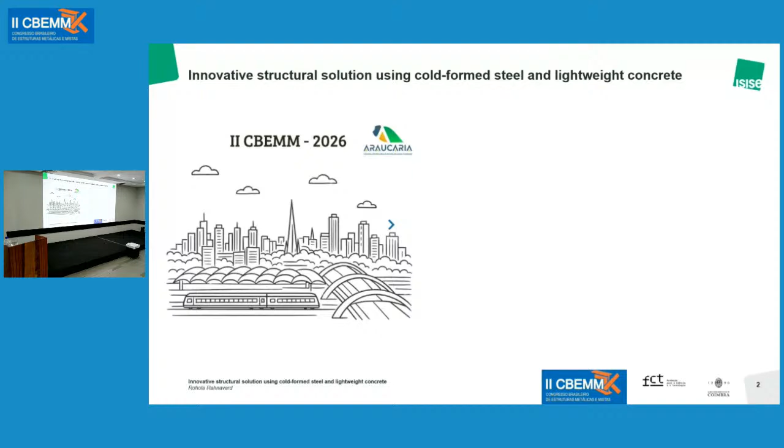I would like to say that this is my first visit to Brazil and Maringá. However, my history with Brazil is about 30 years. I'm going to explain this history briefly. I was born and raised in a small town in a corner of Iran. When I was 5, I don't know why, but I just fell in love with a football player at that time, whose name was Bebeto. Maybe because his name was so easy and nice. So when I was 5, I knew that I am an Iranian and I like a football player from Brazil.

But 20 years later, I moved to Portugal to continue my education at the University of Coimbra. In 2020, during the pandemic, I was alone in the lab preparing my tests, some of which I will explain here. Then a Brazilian student just entered the lab. It was his first day. That student was José Filho. Later he told us that we have to call him Zé.

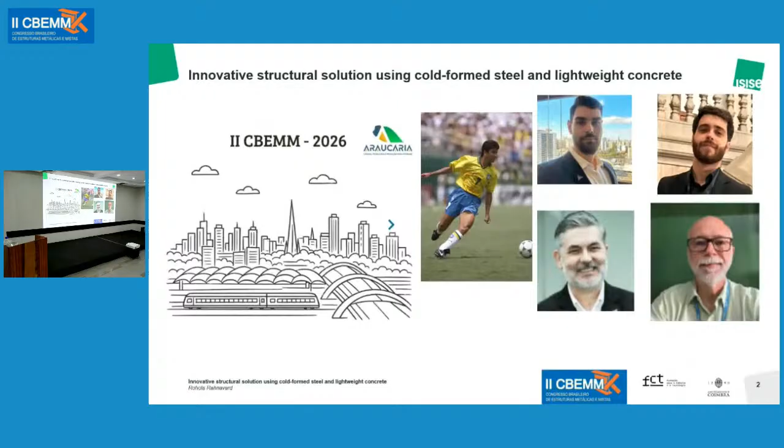Two years after that, I went for a short visit to Luxembourg and I met another Brazilian from Maringá, Adriano. They both talked about their supervisor and colleague from Brazil, and they introduced Professor Caldas. I met Professor Caldas at the CMM conference, and immediately we became friends, like we had been friends for a long time. At the CMM conference, I also met Professor Luciano for the first time. After the conference, he said that we would see each other in 2 years. But 1 week after that, I went to Hong Kong for a conference with Professor Da Silva and Professor Elena, and there I met him again. In Hong Kong he also said that, well, probably we would see each other in 2 years. But here we are after 3 months in Brazil, and I met him again.

So let's move forward to the technical part of my presentation. I will talk about an innovative structural solution using cold-formed steel and lightweight concrete. This is a system that we proposed and investigated over the last 2 years. Basically, this slide shows everything about my presentation because we investigated the column, the beam, and the connection.

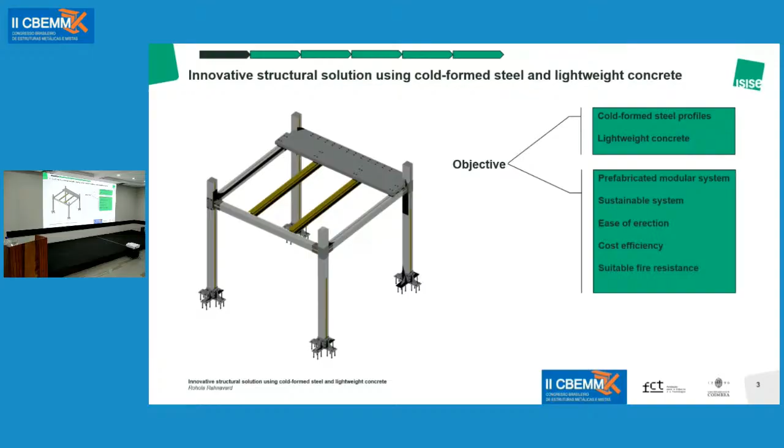This was our objective: to present an innovative system using cold-formed steel and, of course, lightweight concrete in order to be prefabricated, sustainable, and cost efficient, and also suitable in terms of fire resistance. For this purpose, we tested columns, beams, and plug and play joints. For the column, we performed test, simulation and design under compression and fire. Then for the beam, we tested under bending effects and also subjected to elevated temperature.

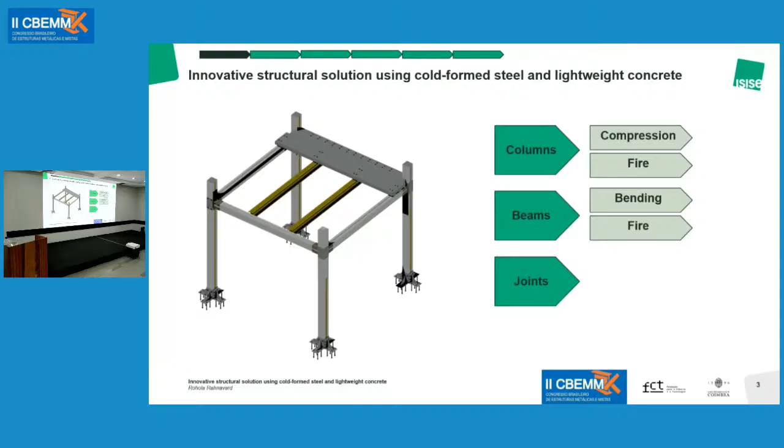Now, let's move on to the first chapter, which is the composite column. Our research team in this section was Professor Elder and Professor Rui Simões. I also received significant help from two technicians, Vidal and Miguel, from the University of Coimbra.

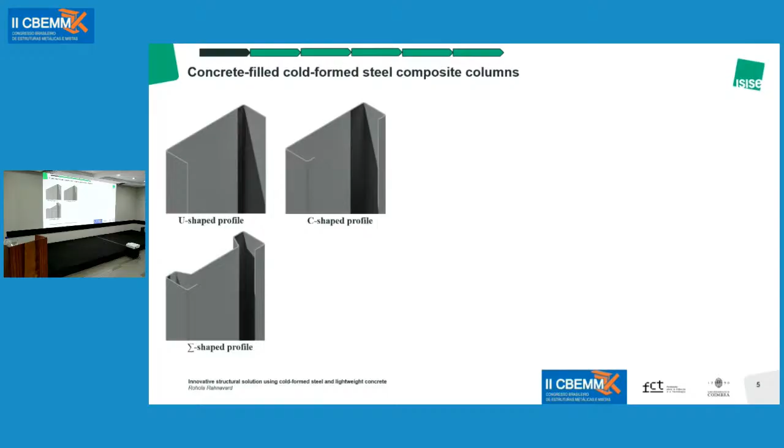For the composite column that we presented, we used three sections that we call U-shape, C-shape, and sigma. We built up the section using self-drilling fasteners and then filled it with lightweight concrete. Here is a photo of the experimental test that we prepared in the lab.

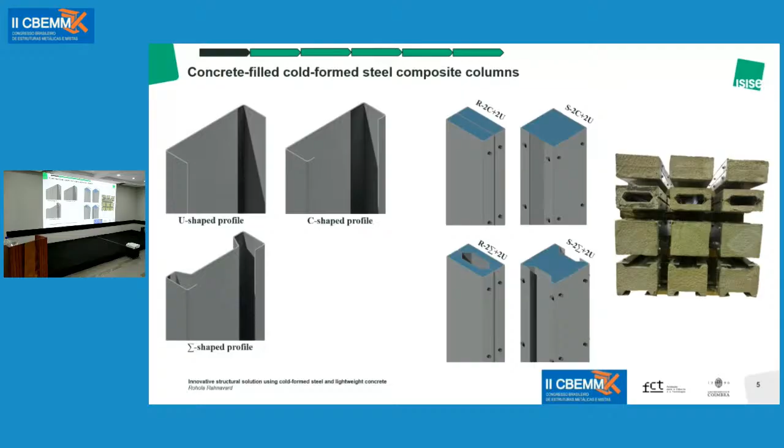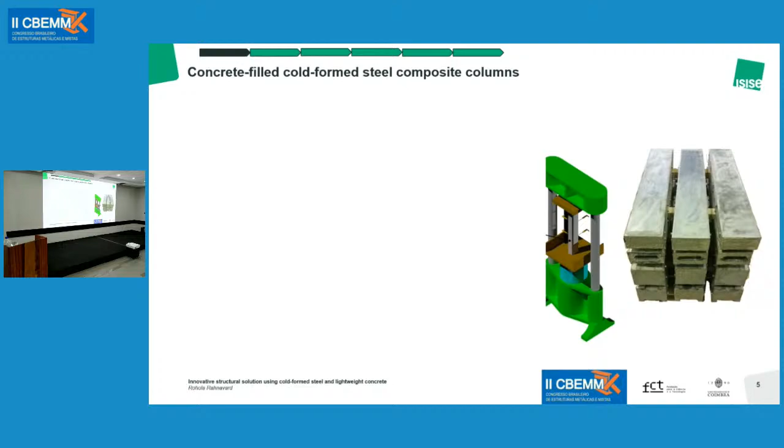We tested two types of column in terms of slenderness. Columns of approximately 1 meter, for which we used the universal testing machine. And then we tested 3-meter columns to see the effect of slenderness. For that, we assembled a test setup for the 3-meter test.

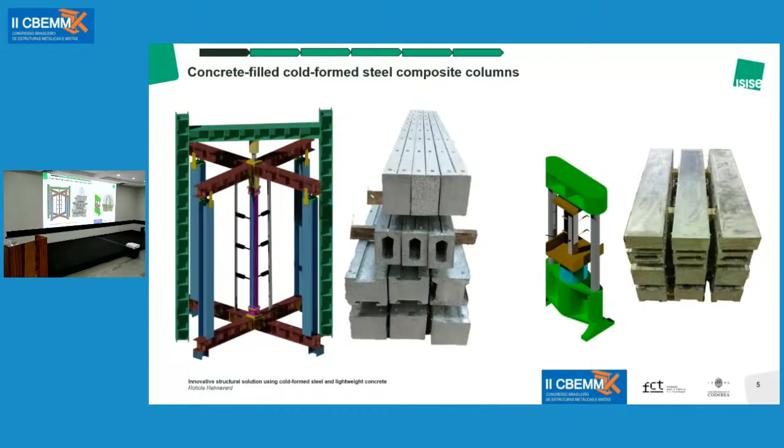We had one challenge. Maybe you see this column is without any deformation. Actually, this was the first test that we did, and we didn't have a proper boundary condition. The section of the column is about 1.5 millimeter, and if you don't have a very smooth surface to transfer the load from the machine to the concrete and steel at the same time, you will have crushing at the boundary condition. Therefore, we clamp the column from both sides in order to protect the boundary condition of the column from early failure modes.

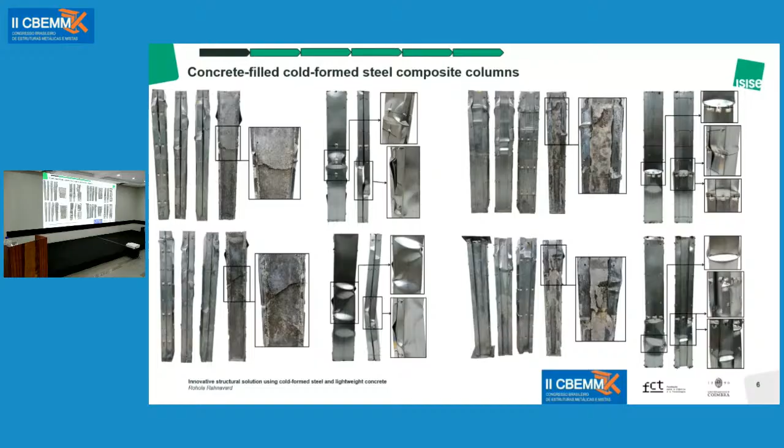Also, we tested the column without concrete, basically bare steel, okay? The reason that we did this was first to see the behavior of the cold form steel sections. Also, later on, in order to propose equations to determine the capacity of the composite column, we decided to do the test to see the contribution of the cold form steel section within the composite system. Also, we wanted to know if the behavior improved or not compared to the steel section itself.

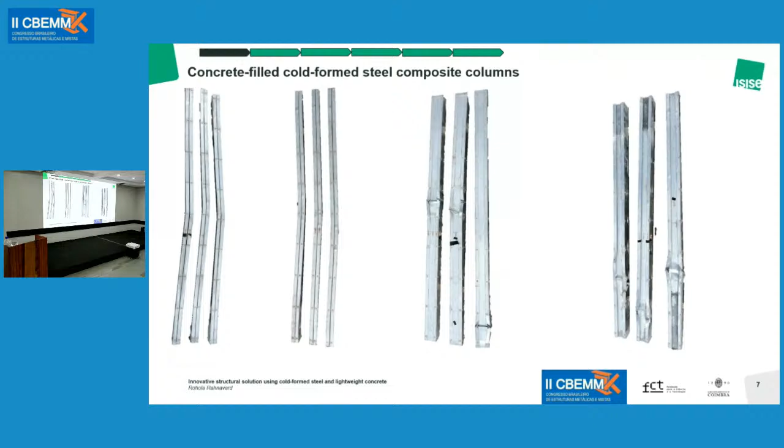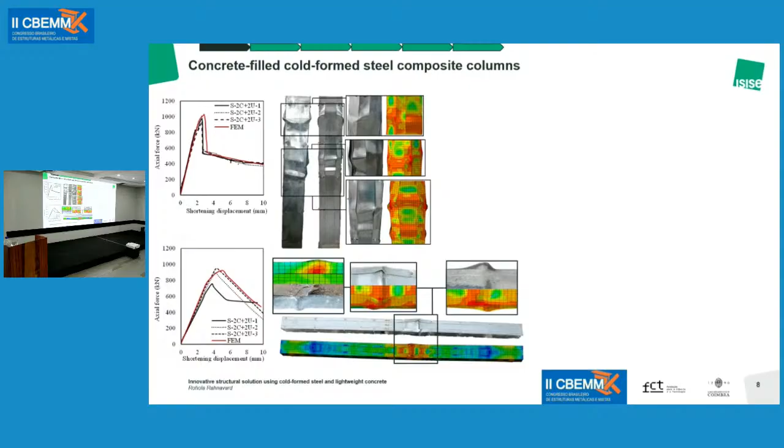And then we went for the calibration to have a reliable model that can well predict the behavior, because later we can extract some data from the models that we cannot extract from the test. So here you can see that the simulation well captured the failure, the loading, the capacity, and the behavior. After having the understanding from the test and also calibration, we performed a parametric study on the composite column.

But here we have only these two sections, and these analyses were only for stub columns because we wanted to know the plastic resistance of the composite column, not for the long column, okay, just plastic resistance. So we designed the stub columns so that their non-dimensional slenderness be less than 0.2 to have the plastic resistance.

So we basically ran 1,300 simulations with 2 different steel grades and 3 types of thickness, 1.5, 2, and 3 millimeters, and also the profile height from 100 to 300 millimeters. The reason for this range was that this is the range of the cold form sections that we have in Portugal and Europe. This is more or less the range.

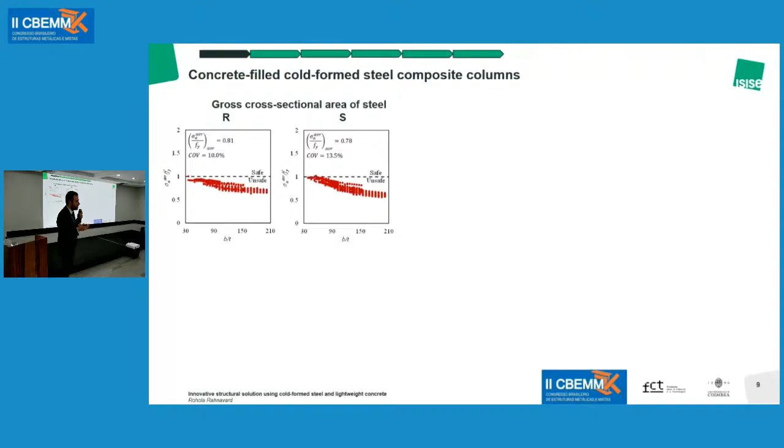Therefore, we consider the whole cross section as effective cross-sectional area. We calculate it for the whole section, and you can see that the results are in the unsafe region, with a result that is way less than the experimental test and the simulation.

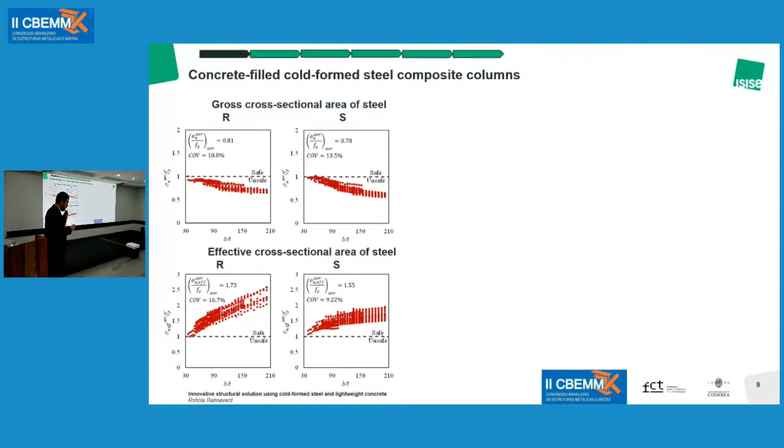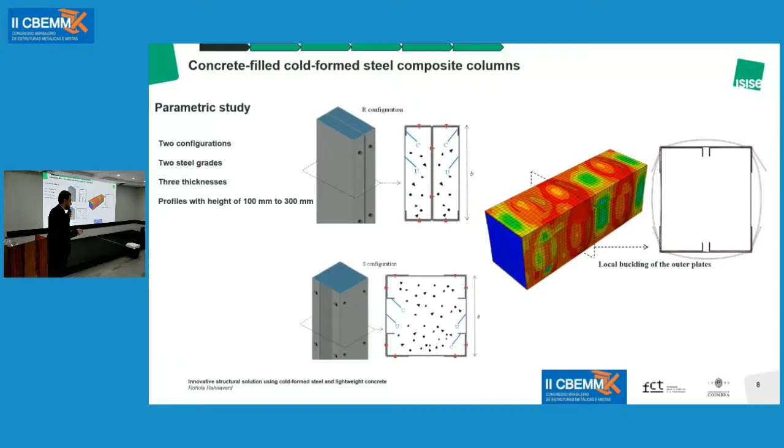If you remember from this slide, we said that the inner section remained unbuckled. Therefore, according to this, we classified the section: for the inner core, which is colored here in blue, we consider gross cross-sectional area, and for the outer surface, which is in red and green, we consider effective cross-sectional area.

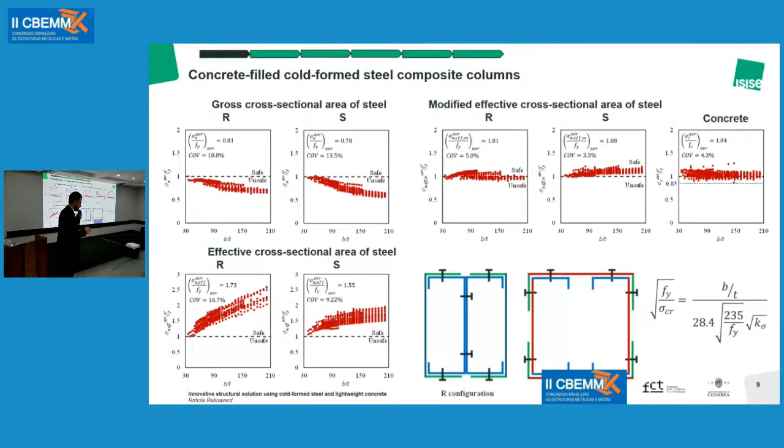Also, we extracted the contribution of concrete now. Eurocode suggests 85% of the resistance of the concrete to be calculated, and says that with some modification you can consider one. We examined it here, and the result shows that the factor of 1 is fair enough to calculate the resistance of concrete within the system. So finally, we compare the plastic resistance of the composite section with the simulation.

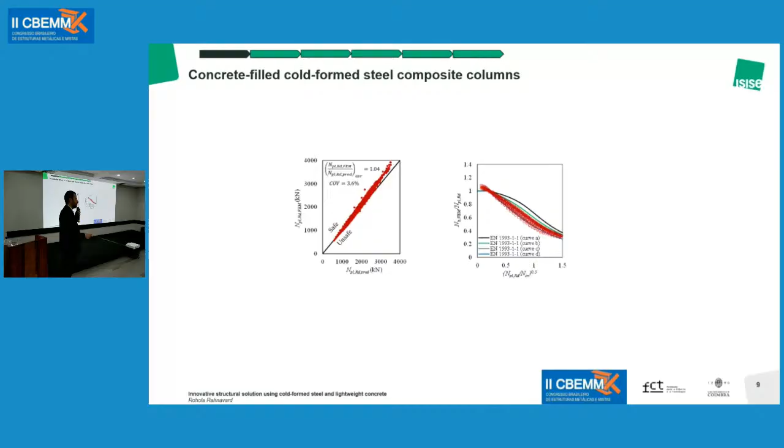Here you can see 1,300 simulations show that the resistance of the finite element over the prediction is around 1, with a coefficient of variation of around 4, which is acceptable. Also, we did more or less 7,000 simulations for the slender column, and we compared it with the buckling curve according to Eurocode. And the final conclusion is that buckling curve D is more accurate for such a composite system.

Now we tested the same columns. It's hard to say the same column, but a replica of the other column, subjected to elevated temperature. The team was the same, only Professor Luís Laím, who is an expert in fire, was added to the team. For the test setup, we also had a setup that we built, and we covered the specimen with the electric furnace that we have at the University of Coimbra. So we had two types of tests, short ones and long ones. I'm going to explain the buckling and failure mode later.

Now I jump and briefly go to the simulation and calibration. The failure mode of the long and short columns was local buckling of the steel section. Here you can see that for the short and for the long column, the failure mode was due to local buckling.

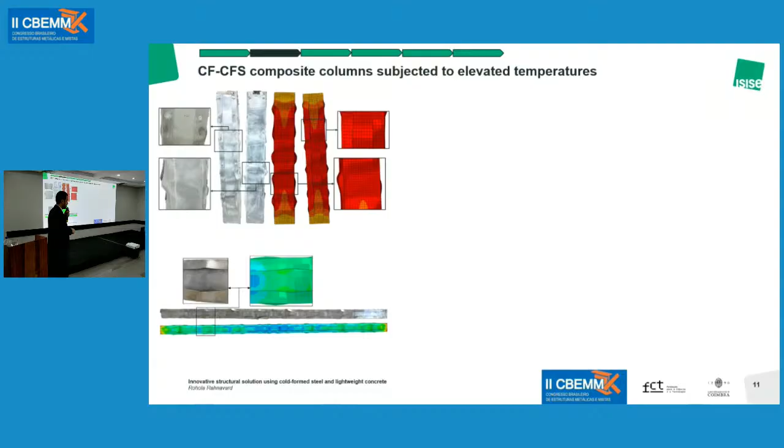Then we performed heat transfer analysis in Abaqus, and we compared the result on the surface of the steel section and inside the concrete, the temperature evolution, for the short one and for the long one. Of course, we measured the temperature at many levels of the column, but here we are presenting the mid-level, using the thermocouples that we had.

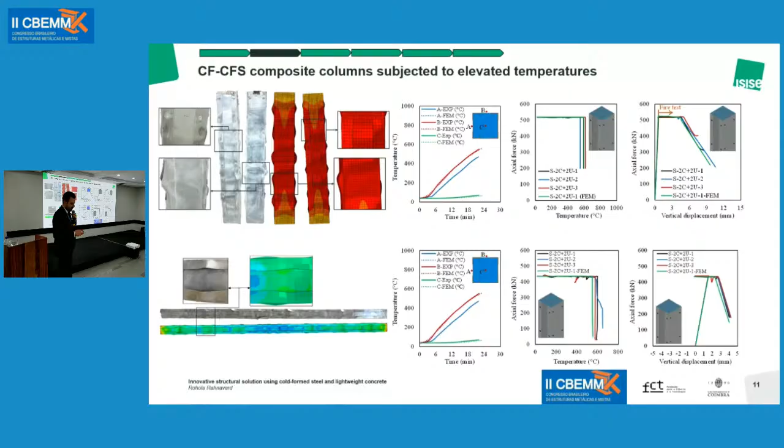Then we performed a fire resistance analysis, and we compared it with the experimental data, which is in very good agreement. Also, we compared the elongation, because the elongation of concrete and steel is way different, but within the composite system it is so difficult to capture. So we checked the elongation of the composite system and compared it with the finite element simulation, which were in close agreement.

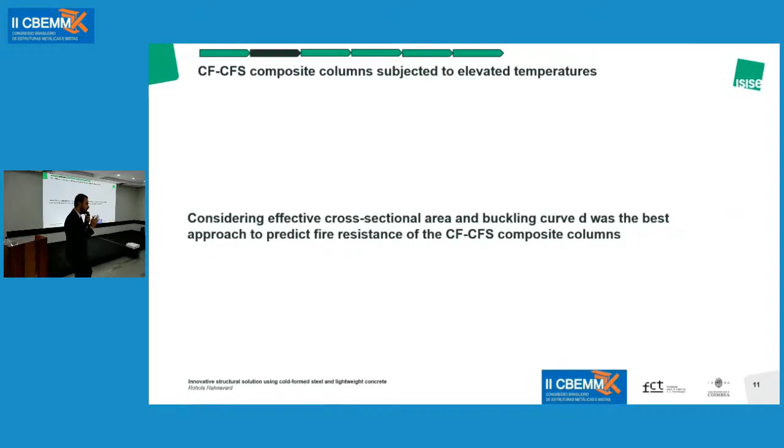Also, we compared the result with Eurocode, and according to our calculation, if we consider effective cross-sectional area and buckling curve D, we are in good agreement with Eurocode 4, part 1-2.

This explosion happened 30 minutes after the test was finished. So we had the test, we saw the fire resistance, and then the furnace was closed. I went to my office, which was very close to the lab, and then after 30 minutes, we heard like a big explosion. Then I said, oh my God, I want to be promoted by Professor Da Silva. I don't want to be fired. So we have to analyze because we are going to damage the electric furnace.

So my colleagues said that we have to probably warm up the column in order to release some of the moisture. So we did that for 8 hours with a temperature of 50 degrees just to warm up the column. Then we did the test, and I said, look, this is a possibility, but we have to monitor it. So I was close to the furnace, monitoring, and after like 30 minutes, again, there was an explosion. And then I said, oh, for sure, I'm going to be fired.

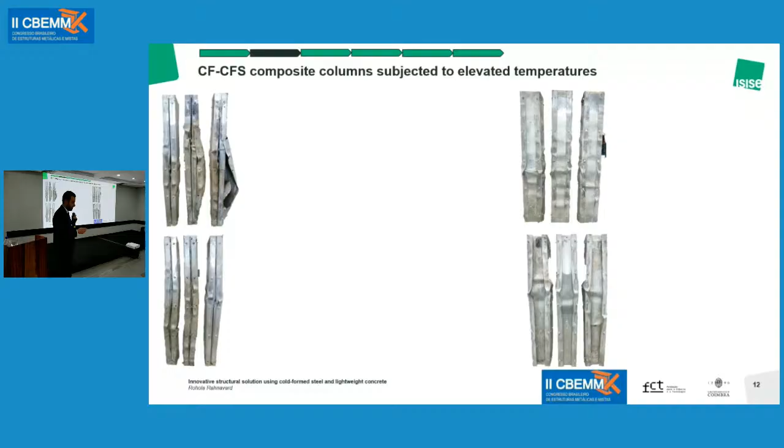But during that monitoring, I realized that because the furnace was so hot, we could not open it immediately due to safety. But what kind of safety? We had explosion after. So when the furnace was closed, the air temperature was about 700 or 800. To make a balance, the temperature of the concrete inside was about 70. So after 30 minutes, the temperature of the air went to like 500, and the temperature of the concrete increased to 200. That's why we had the explosion. So we decided for the later tests to open the furnace slightly, and we took the risk to open the furnace slightly, and then we didn't have an explosion in the next test.

Here also is an image of the cold-formed steel section without concrete, and you can see that the failure mode is that basically the thin wall steel was somehow melted.

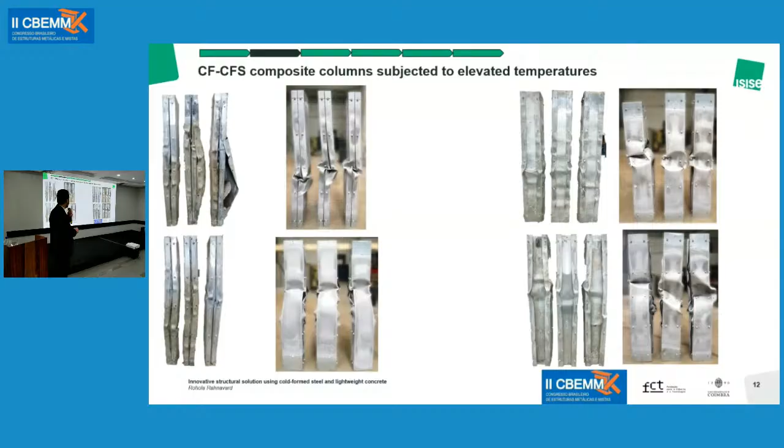Another challenge later in design that we had in composite column was that if you design composite column according to Eurocode 4 part 1-2, you need to have heat transfer analysis, and then you have to divide the concrete section into different layers with somehow uniform temperature. The calculation is complex because you need the heat transfer analysis, and heat transfer analysis is not easy to be performed. So we defined a task there. We have to tackle this also.

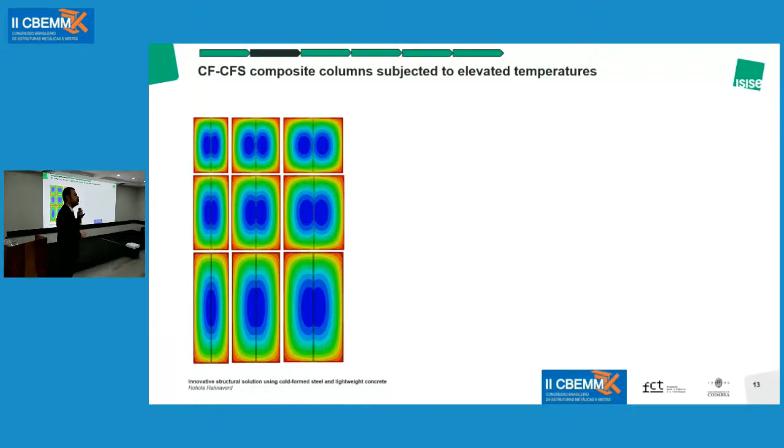So we did 3D simulation of heat transfer analysis, and you can see here that the temperature in the inner core, about 50% of the edge, and the outer core is somehow uniform. So we presented an empirical formulation that can estimate the temperature over time for the core of concrete, inner core, outer core, and the surface of the steel. So we calibrated this formulation. Of course, we calibrated the heat transfer analysis before. Later, we calibrated the empirical formulation with the finite element simulation.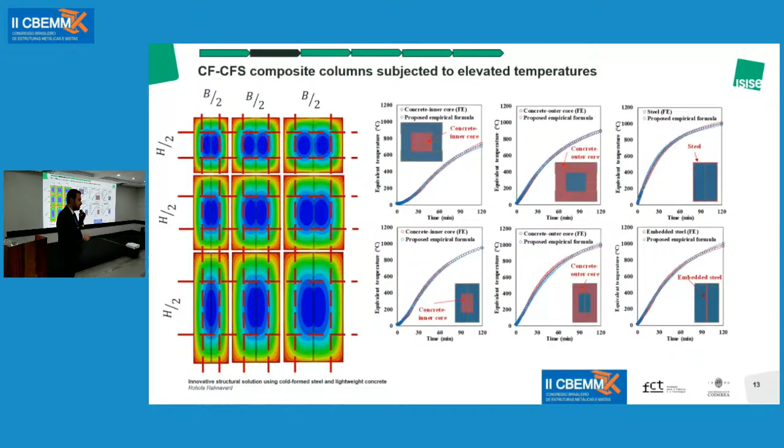And here you can see that for the inner core, outer core, steel, and again for the other section, inner core, outer core, and the embedded steel, we could capture the temperature evolution. Okay, so we're done with the column. Now we go for the beam.

The same team, but when we were close to design, we had the help from Professor Benjamin Schafer and Professor Shahab Torabian from Johns Hopkins. So for the composite beam we had two back-to-back sections, lipped channels attached by self-drilling fasteners. And then we connected the steel section to the concrete slab using bolts. The reason for that was that we were using thin wall steel section. We cannot weld it because we may burn the steel. So the solution that we had was to use bolts.

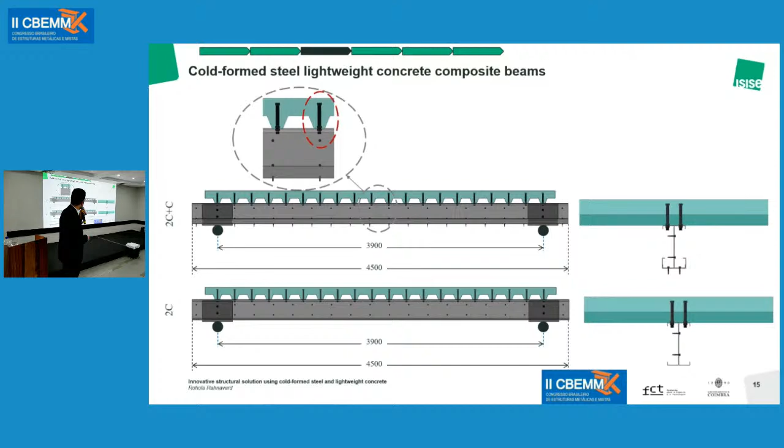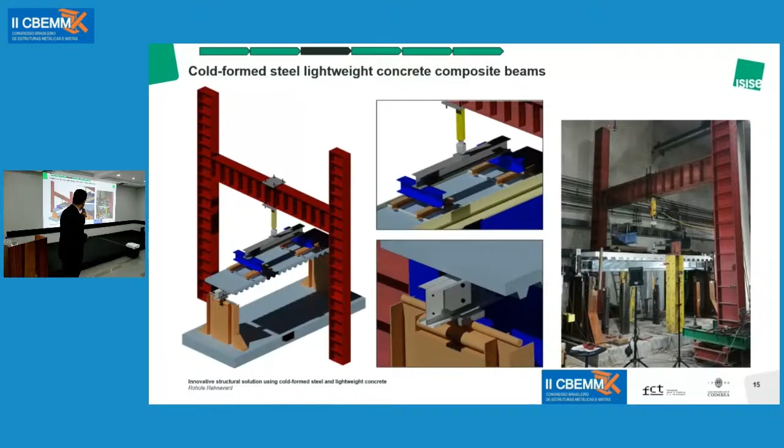Here you can see some details. And briefly, the test setup was a 4-point bending test. And here you can see the failure mode and comparison with the finite element analysis. Because I have calibration and later formulation, I'm skipping showing all the results of the test.

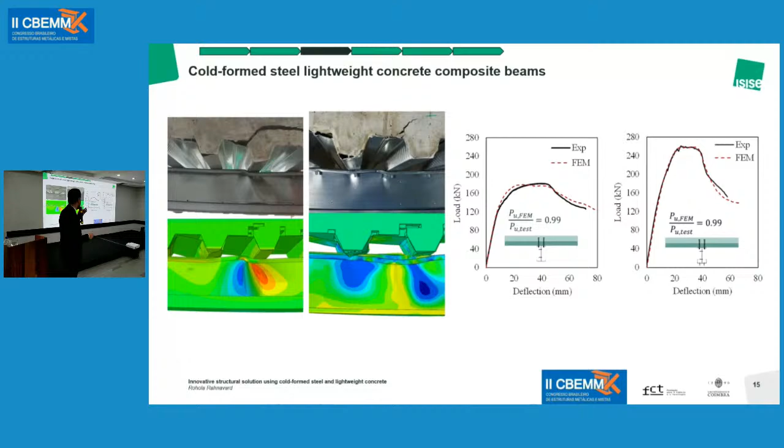So we performed 720 simulations of composite beams with different lengths, just to give you an idea how long it takes for one model. If you have a model with 3 meters and a mesh of 20 millimeters for concrete, the running time until you have the failure mode is about 8 hours with the computer, if you're using 8 cores of Abaqus, okay?

The biggest model that I had was 8 meters, and if you do it with the same computer, it is probably more or less 7 days. But I was lucky that I used the HPC and I ran the models in a very short time. So we had 5 spans, 2 configurations, 2 steel grades, 4 concrete grades.

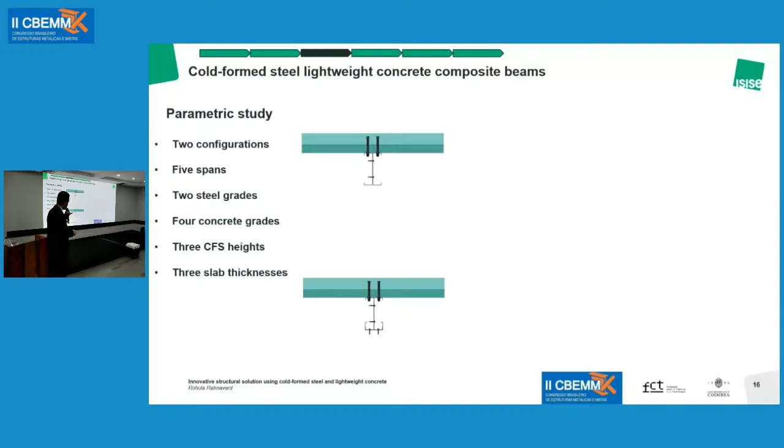I will explain the concrete modeling later in the next section. And we had 3 heights of the section and 3 slab thicknesses. So we compared the results with Eurocode 4. You can see that the results are falling in the unsafe zone. The reason is that Eurocode 4 doesn't cover shear connectors that are bolted shear connectors.

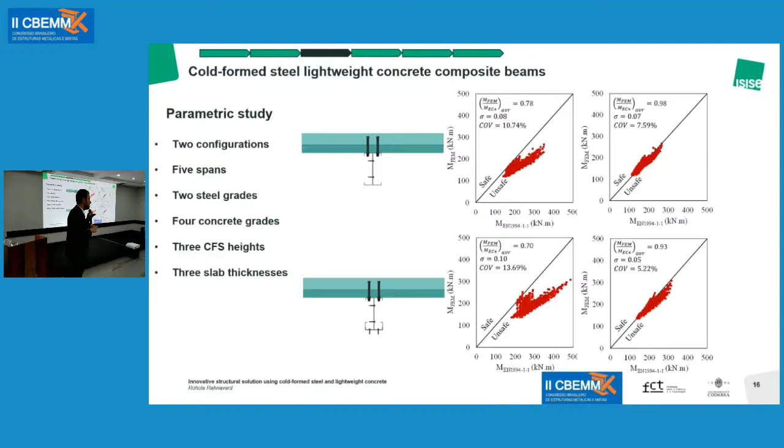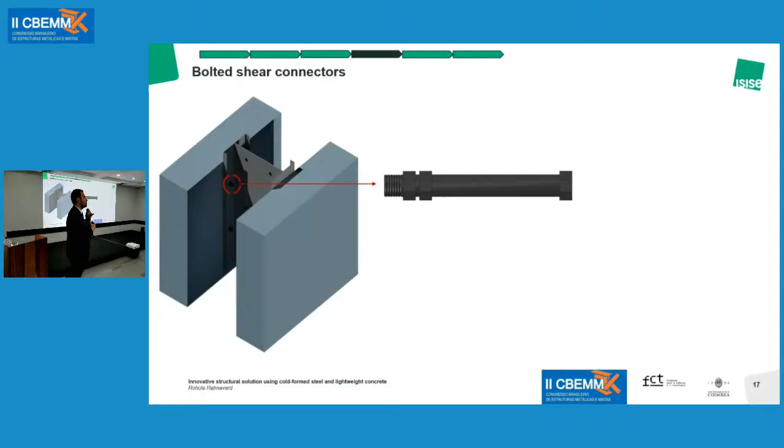And also Eurocode 4 has a limitation that specifies that the diameter of the bolt over the thickness of the flange should be less than 2.5. But here we have something about 6.4 because we are using a thin-wall section. So we did a push-out test just to measure the shear resistance of the bolt here. And we can see that the result is much closer to the parametric study and the finite element.

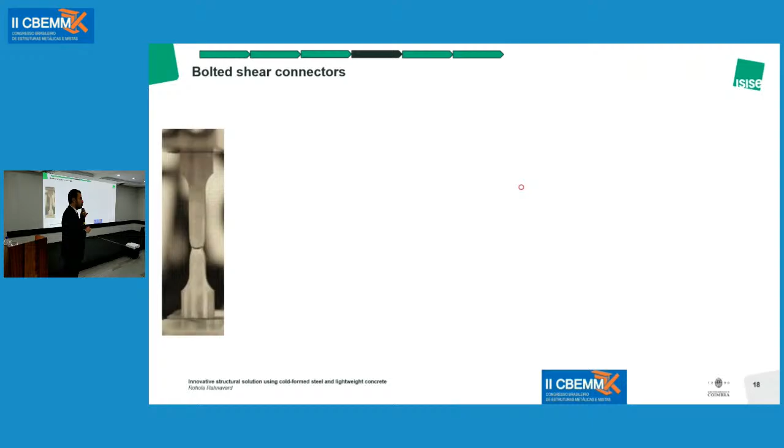So then we decided to tackle this and propose a formulation for the shear connector, like the bolted shear connector within the composite system. For that, we started a detailed modeling to capture the fracture of the bolt, fracture of the cold-formed steel, and failure of the concrete. So now I am explaining the bolted section, only the bolt material.

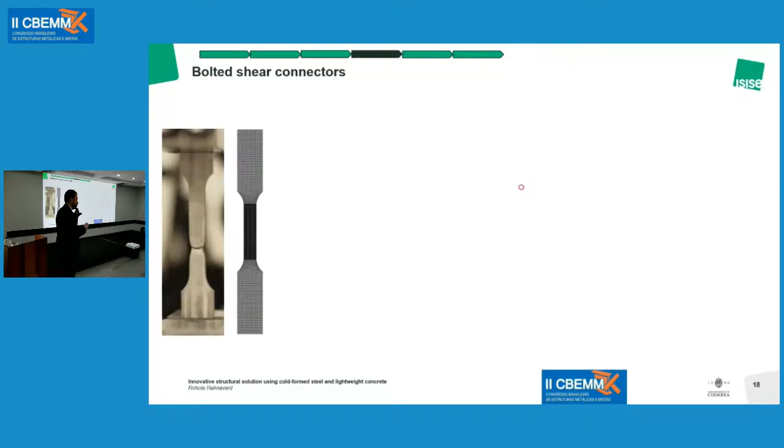This is a coupon that was extracted from a bolt, done at TU Delft. We converted the engineering to true stress-strain curve using this formulation. And then we calibrated only the coupon test and extracted information like equivalent plastic strain and triaxiality for this point. And then we drew the triaxiality. But this triaxiality, we only calibrated for the tension region, but for the interaction between tension and pure shear, we have to calibrate it with the shear test of the bolt.

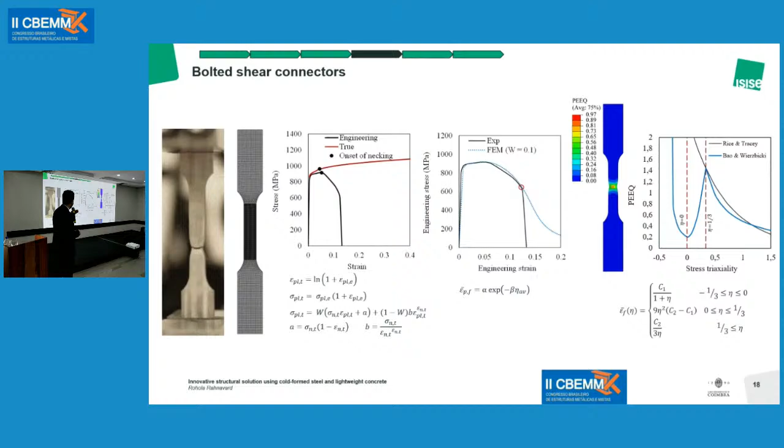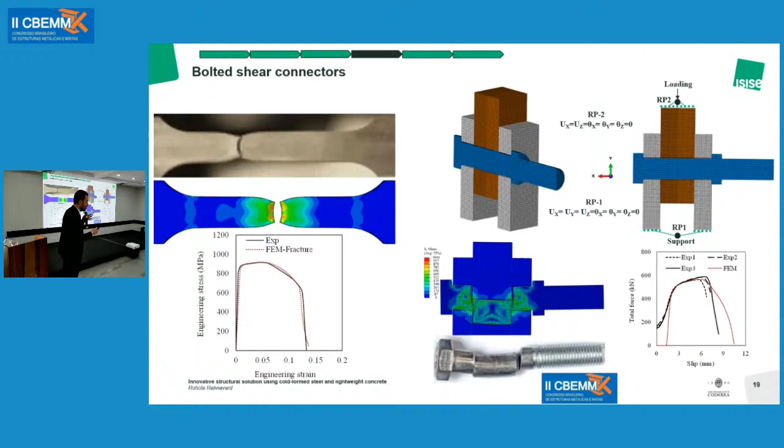Okay, so for the coupon test, we calibrated the engineering stress-strain curve, and for the shear test of the bolt, we also calibrated the failure mode due to the shear against the test. In order to give you a feeling of the modeling, I have two videos here of the shear test and tensile test, including the fracture for the selected bolt. Usually when you have a failure mode due to the shear, you have a cut, like a smooth surface after the failure.

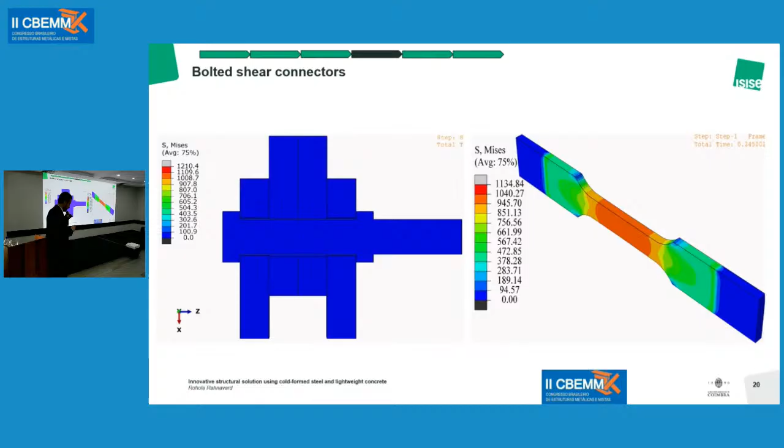Then we simulated the behavior of concrete, which is so tricky in Abaqus. So we had 3 grades, linear up to 40% of the maximum, and then non-linear. Also, we modeled the concrete in tension. You see the stress-strain behavior and damage variable.

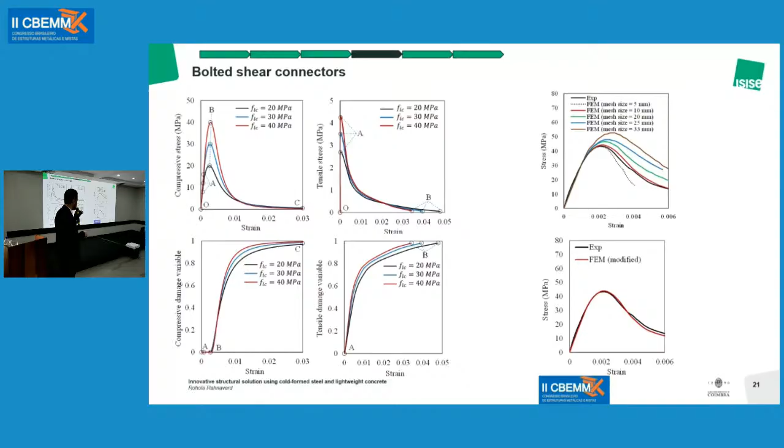One thing that needs to be taken into account, which I propose in the paper and have almost nowhere else seen, is that the compressive behavior of concrete is also mesh dependent. So this is a comparison of compression tests of the same material, only I changed the mesh size, and the results are so different. So I propose a modification to model the concrete behavior in compression as a mesh-dependent variable. And here you can see that the compression behavior is well calibrated with the test.

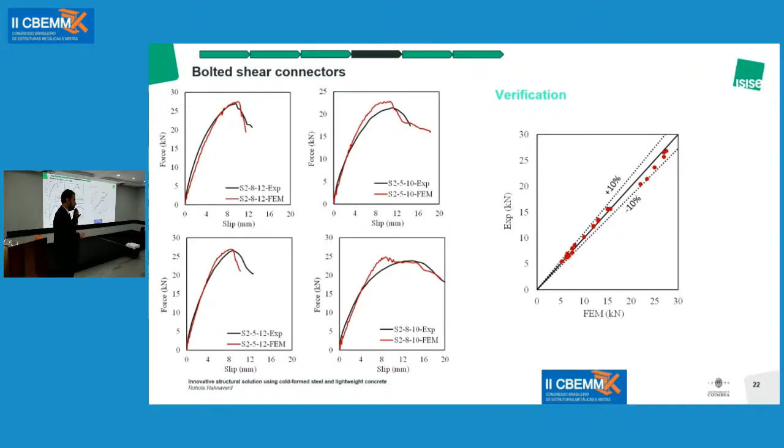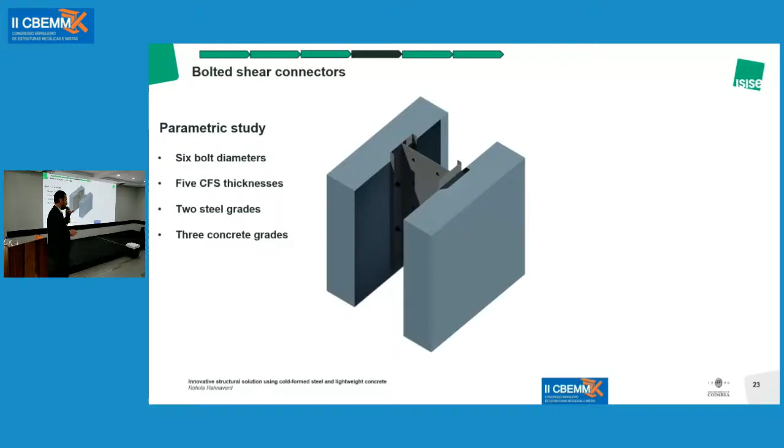And then later, we calibrated the push-out test with about 27 experiments available in the literature. And now we move on to do a parametric study only for push-out tests and the shear connectors. So we had 6 bolts, 5 thicknesses of cold-formed steel, 2 grades of steel, and 3 grades of concrete. We compared the results with the equation according to Eurocode. We expected that the results would not be aligned because Eurocode is not for this type of shear connector.

So we added a new failure mode because the Eurocode equation for shear connectors says that the failure mode is either the shear failure of the studs or the crushing of concrete around the studs. But since here we are dealing with a thin-wall structure, we have to take into account that the failure mode might be because of the bearing of the hole in the cold-formed steel, because you're dealing with a very thin-wall system. So we considered the resistance of the hole of the cold-formed steel according to Eurocode 3, and the results were more or less close.

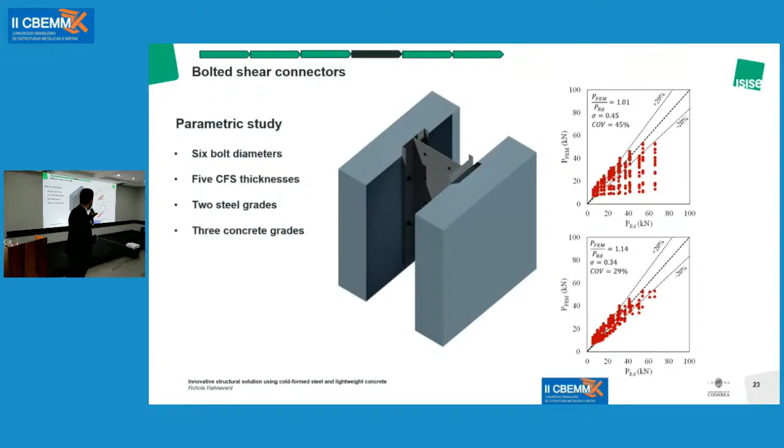So then we went to modify and propose a new equation for this type of shear connector. So we analyze the different failure modes of the bolted shear connector. The first failure mode, this is a typical failure mode, was because of the crushing of the concrete. And then after that, this corresponds to point A here.

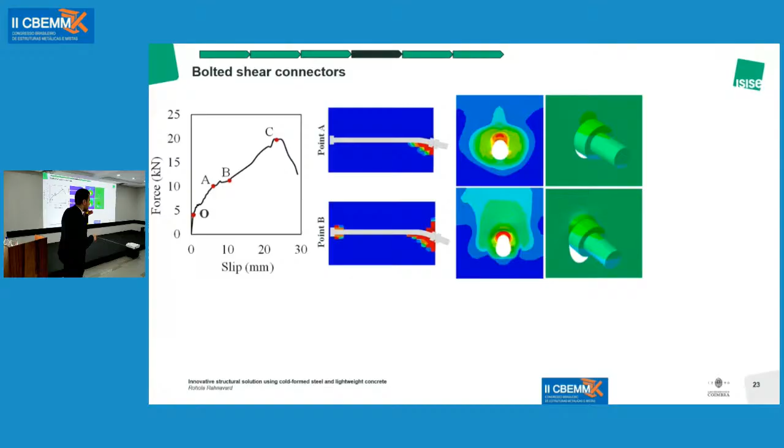And then after that, we had failure due to the bearing of the hole. And later at point C, which was the maximum, the failure mode was because of the tearing, okay? Tearing failure mode. So this is our proposal, that we consider a limit for the linear behavior and a certain limit for the maximum non-linear behavior. So if the slippage between steel and concrete was about 0.6 millimeter, we consider it linear. And if the slippage was 6 millimeter, we consider it maximum non-linear, because

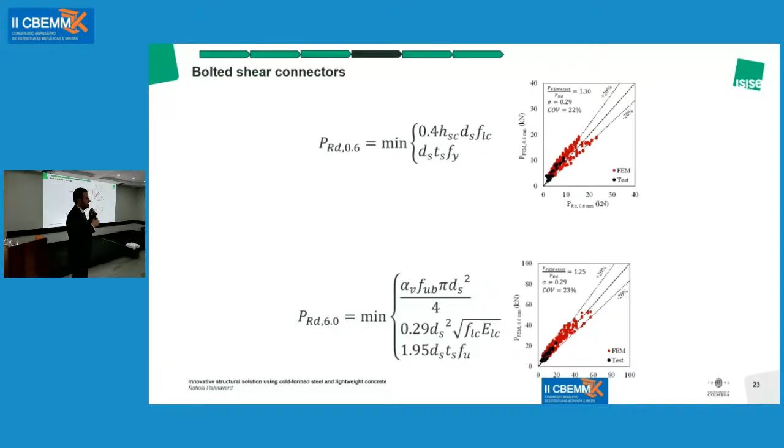in the previous slide, you saw that, let's go back. You see that the slippage between steel and concrete is about 25 millimeter. If we have this slippage in the composite beam, probably due to the deflection, the composite beam already has failed, okay? So we consider 6 millimeter as the maximum. So using this formulation, now we went to propose a design for composite beam.

So this design proposal is different from what we have in Eurocode 4. Eurocode 4 says that you have to take 90% of the maximum capacity of one shear connector and do the design according to that. But in our system, we may not reach the maximum capacity of the shear connector in all shear connectors. So the design that we propose here is based on a slippage between steel and concrete.

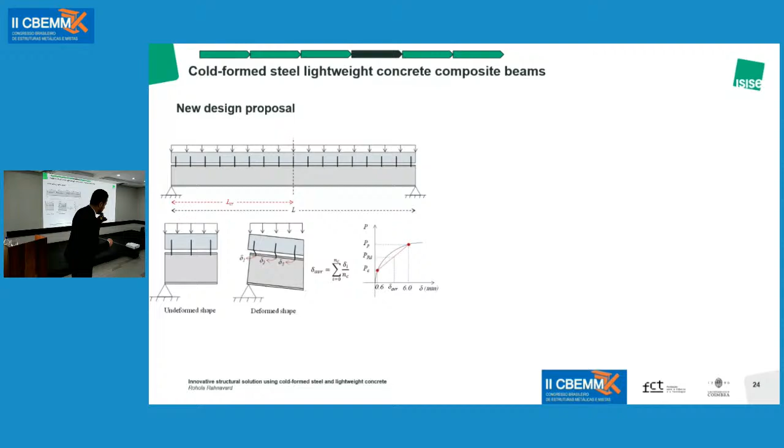But then another challenge was raised, because we need to have the slippage between the steel and concrete in the composite beam. So we propose a new empirical formulation that is based on geometry and material property of this section that can determine the average slippage between the steel and concrete in the location of shear connectors. And then later, we design according to the new design rules and compare the result, which is in very good agreement with the simulations.

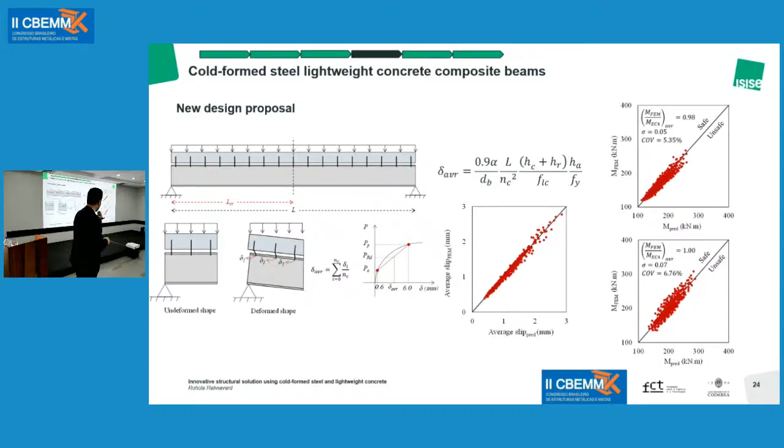Now, composite beam at fire.

How much time do I have? I have time, right? Okay.

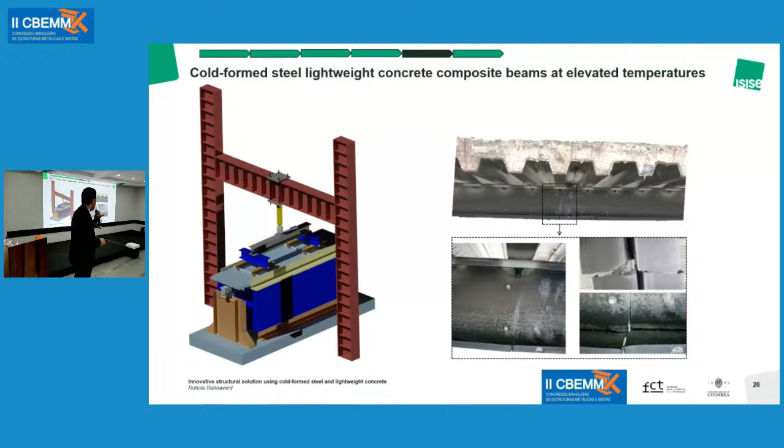We have the same team, but Professor Leroy Gardner also helped us in this section. So we had a very similar composite beam, and we did the fire resistance test. And later, when we opened the furnace the day after, we had the failure due to the fracture of the steel section. So we said, okay, cool, it's a nice image, we can publish the result. But later, when we did the calibration, we realized that, no, we don't have a failure mode in the steel section.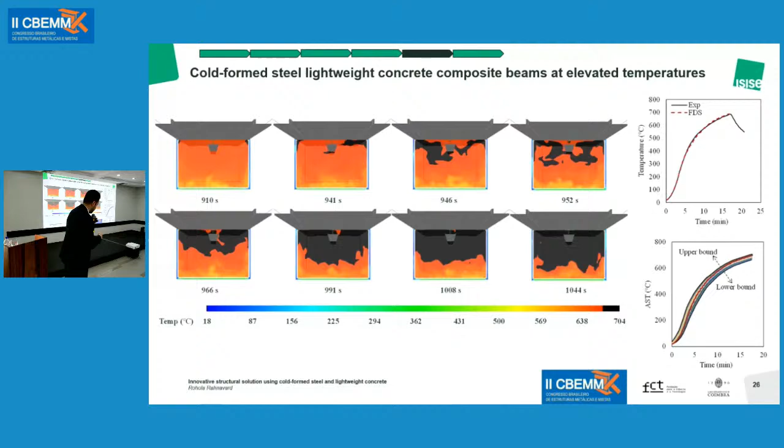So we extracted adiabatic surface temperature in different locations, and then we exported these data to Abaqus. Later, we did a heat transfer analysis. We measured the temperature at different locations of steel and different thicknesses of concrete. So here you can see that the heat transfer could capture the temperature evolution in the concrete in a very good manner. And then later, we

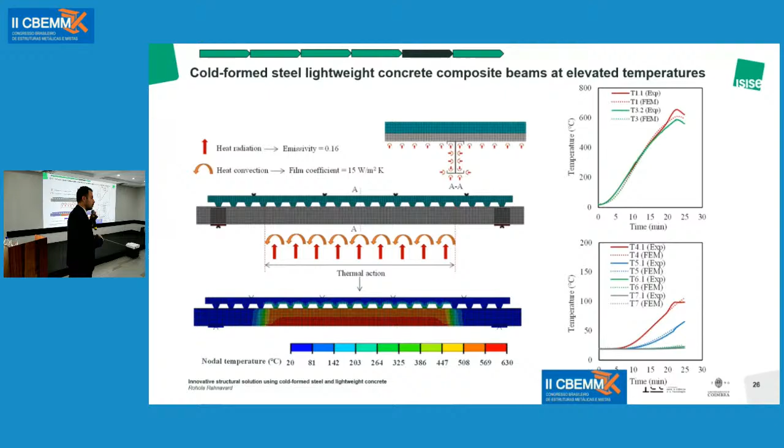did the fire resistance test, and we could capture the failure mode in the steel section. And as the final input of this, I can tell you that the failure mode was during the cooling. Again, we did not open the furnace. We went home, we came back the day after, and we had the failure. Maybe an explosion, who knows, because it was in the afternoon. So the failure mode was during the cooling.

So when the steel returned back, we had this crack and this fracture in the steel section. And also we compared the result. This time Eurocode 4 was in good agreement with the experimental test.

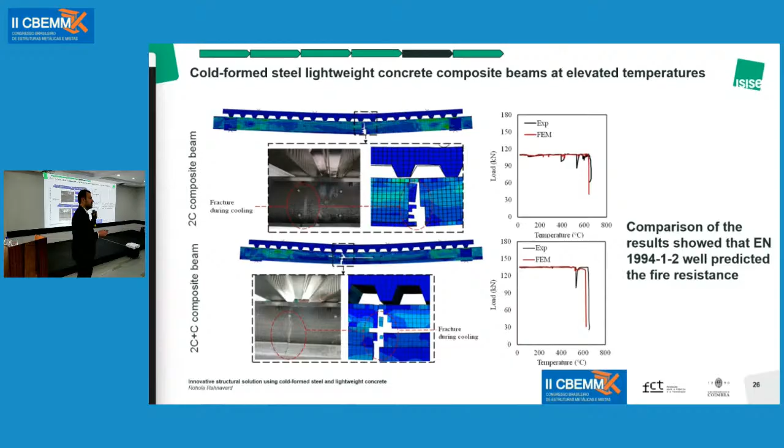So the final section is about joints. The same team. I should say that these two guys are like Superman. I have seen so many laboratories, and it's barely possible to find such active expert people like these two guys, Miguel and Vidal.

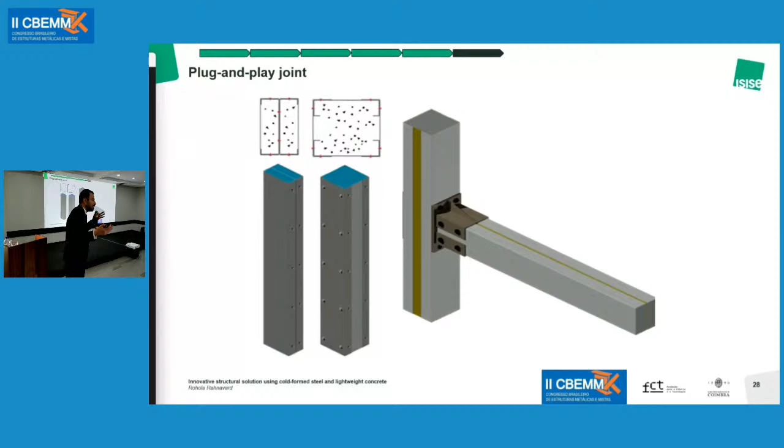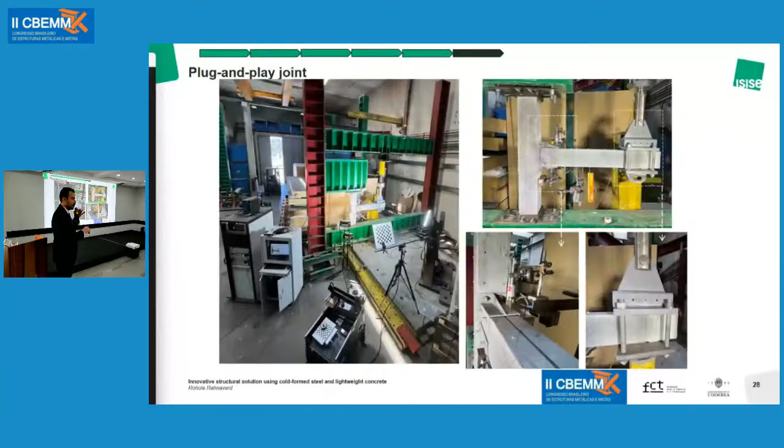So this section is only to see the feasibility of the plug and play joint that we had. We just wanted to plug it and play, and then disassemble it to see if this connection works, okay? This is the test setup. This is a corner of our laboratory at the University of Coimbra.

And then we did 3 repetitions. You see that the failure mode is because of the deformation of the end plate in all sections. Actually, during the first test, before even starting the test, maybe at 1 millimeter of deformation, the bolts just failed. Apparently the bolts were not of good quality. So we bought new bolts and assembled it immediately. So we just said well done to each other, that our connection can be disassembled and assembled quickly.

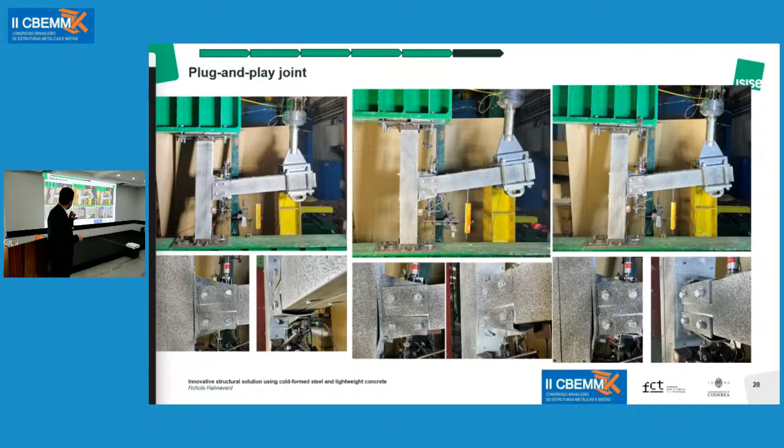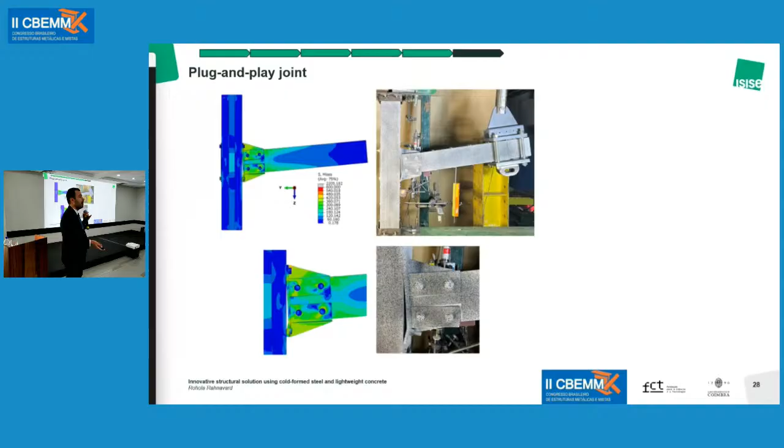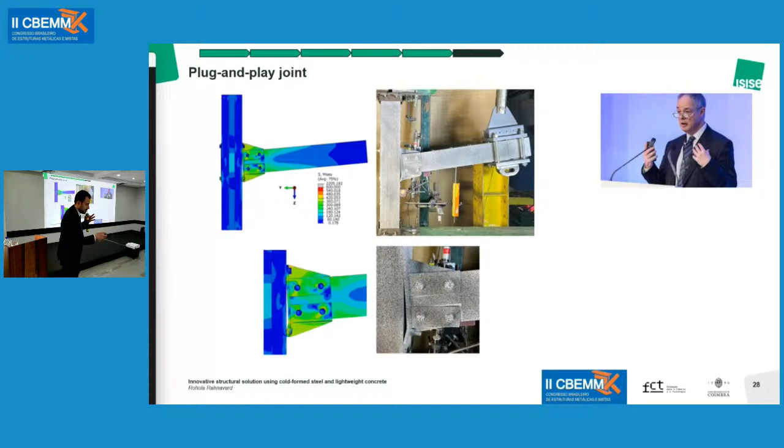Later, to do the simulation, because the failure mode was in the end plate, we did not cut the end plate to have a coupon test to have the precise behavior of that steel. But luckily, at that time, I was working with the big boss to propose a formulation that statistically can replicate different grades of steel. So I said, why not? Let's do the simulation according to our formulation that we are proposing. Let's see if it works. And this is the result of the calibration of the finite element model with the experimental test.

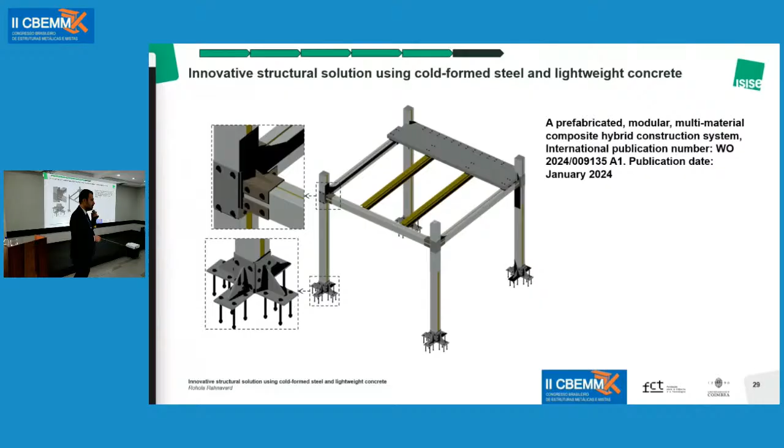So finally, I explain all this section to come again to the first slide, that this was the system that we proposed and has been accepted as a patent worldwide. The result of this study was published in 22 journal papers and some conferences.